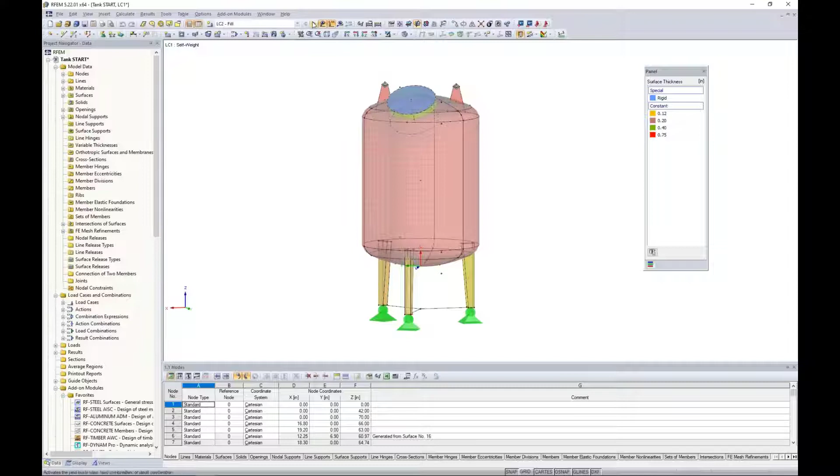We also had applied the loads to the structure, and we can see that within our drop-down box here are our different load cases. We have self-weight, which I don't have any visible loads displayed here because I didn't apply anything to the dead load other than accounting for the self-weight. Load case 2 here is the fill load, and this fill load was just an interior surface load within the inside of the tank.

We also have a wind load, so we can see the windward direction here from the global x-axis. We have a suction force on the leeward side. We also have a compression force coming up from underneath the tank, and we have a tension force up at the top here. Now we also put together all of our load combinations per the ASCE 7. So as we scroll through these, we can see all 3 of those different load cases acting together on the structure.

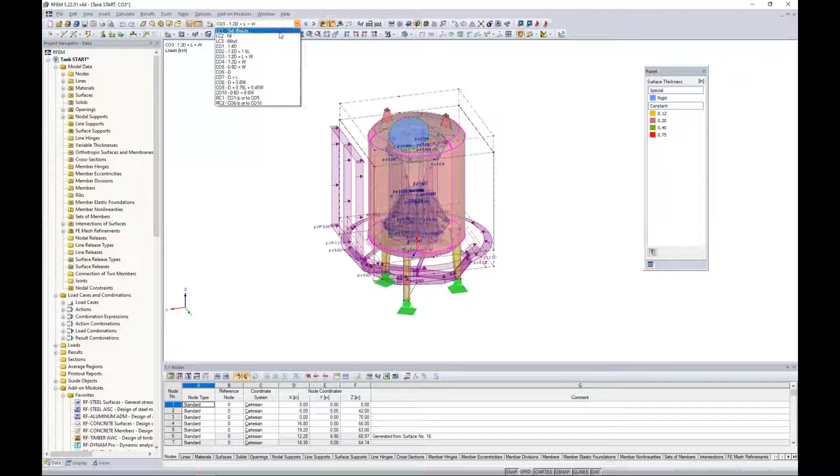So starting where we ended from webinar 1, we'd want to run a calculation, and we can go to calculate all. For the sake of time, I've already went ahead and done so. So what we would be presented once we run the calculation is our results. Within the project navigator, we should now have this 4th tab available to us called results. I think it's helpful if we just collapse most of these trees here, just to slowly go through all of the visible options.

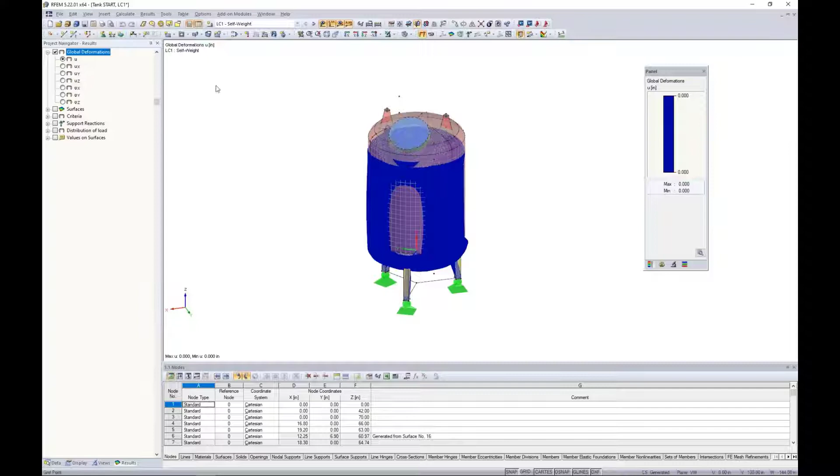We'll start off with the global deformations. As I'm scrolling through these different load cases and load combinations, and I can go ahead and turn off my loads as well, I'll see the general deflection of the structure. So this might be helpful in understanding the behavior under the applied loads. If we see something kind of flying off the page here, then we would understand that maybe we didn't correctly model something, or maybe our loads were incorrectly applied. So it just gives us a sense here if everything is going well.

I'm going to jump back to my fill load. Remember from webinar 1, when I double click on this fill load, we have it increasing linear in the Z direction. At the top of the tank, this fill load is 0, but as we slowly increase the depth, we eventually reach a magnitude of 0.4 kips per square foot, which makes sense since the bottom of the tank sees a higher fill load than the top.

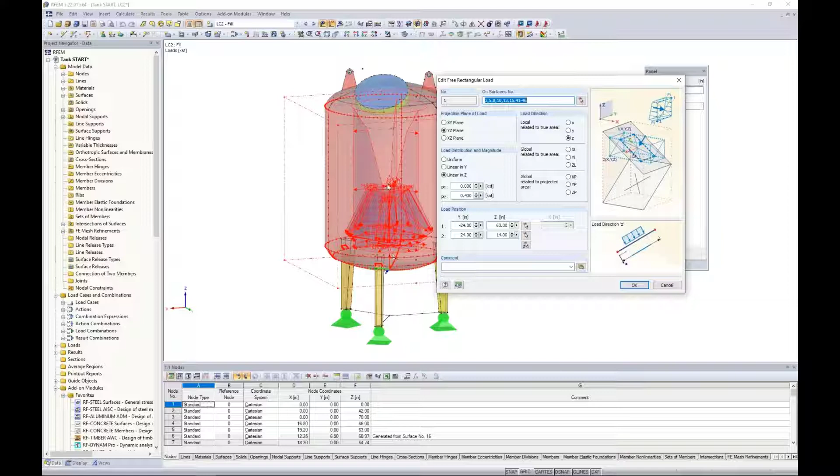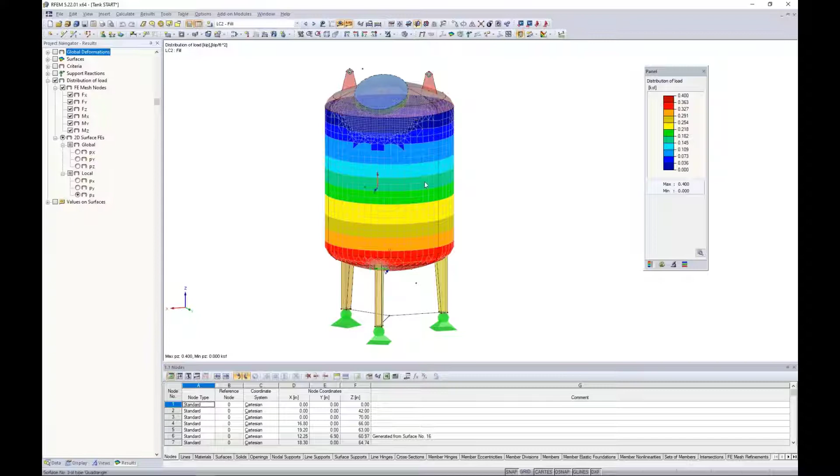With this load case, after running my results, I can turn off the global deformations and instead take a look at the distribution of load. So when I view the distribution of load in the local Z direction, we can see how this load was distributed on the FE elements.

At the top, we have this blue color, indicating 0 kips per square foot, which is exactly what I defined with that surface load. But at the bottom of the structure, we have red contours defined, which equals 0.4 kips per square foot. So this is a nice validation that we correctly applied that fill load.

In a similar sense, we can take a look at the wind load. If I display this load again, we have it acting in the global X direction. Looking at the distribution with these contours, I should see my highest compression force on the windward side, which relates to the negative value here. Then in the back, we have this suction or tension force, denoted by the yellow positive value at about 0.01 kips per square foot.

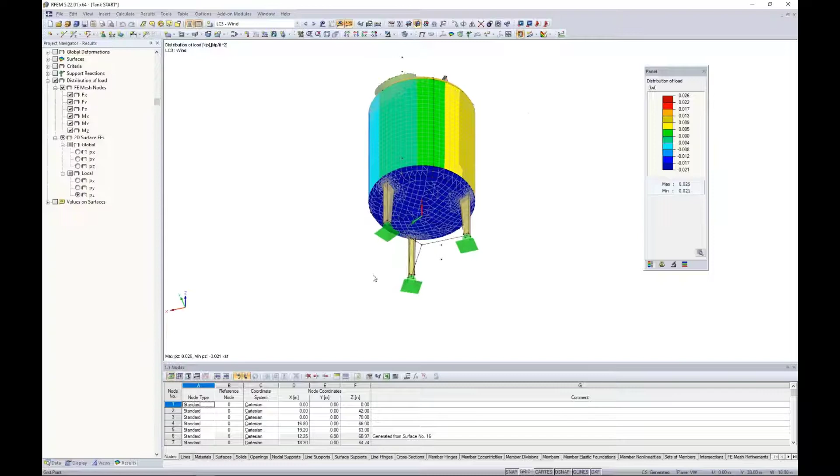At the sides, I should see essentially 0 because the wind passes right over each of the side surfaces, denoted by the green color. At the bottom, this shows the correct compression forces, and at the top we have suction forces denoted by red with a positive 0.026. Again, this is a nice validation to ensure we've applied our loads in the correct manner.

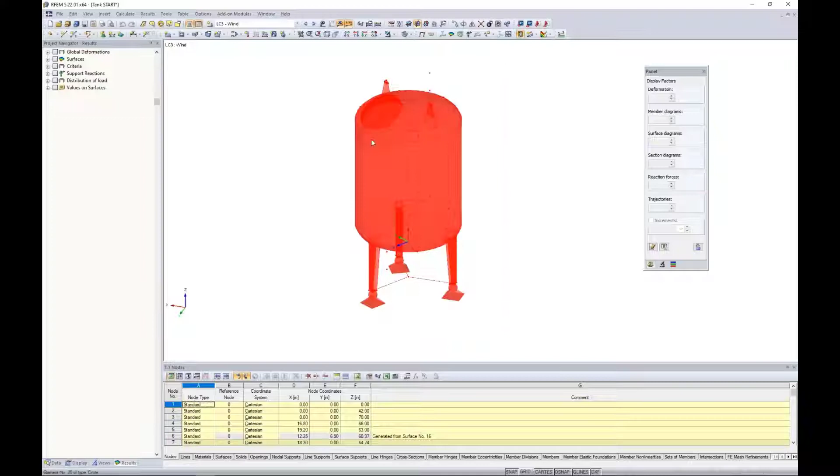We can also take a look at the entire structure by selecting it with my selection box. I can right click and view the center of gravity and info. The program throws up a warning that some elements have 0 density and won't be included in the center of gravity calculation.

We know this because in webinar 1 we created different intersections with our surfaces and deactivated components. We also have our rigid component for the top of our manhole that we wouldn't want to consider for the density, so that's why those are set at 0.

But this will give us the information of the center of gravity, and we can also create a new node. It's difficult to see, but there's a red arrow pointing to the center of gravity. More importantly, we can get information such as the surface area and the coating of the surfaces.

Why would the coating be important? If we wanted to layer some type of coating on this tank structure, or paint, we have the area in inches squared of how much paint might be required. We also have the volume of the material as well as the weight of the material—just a general summary of all the surfaces we've modeled.

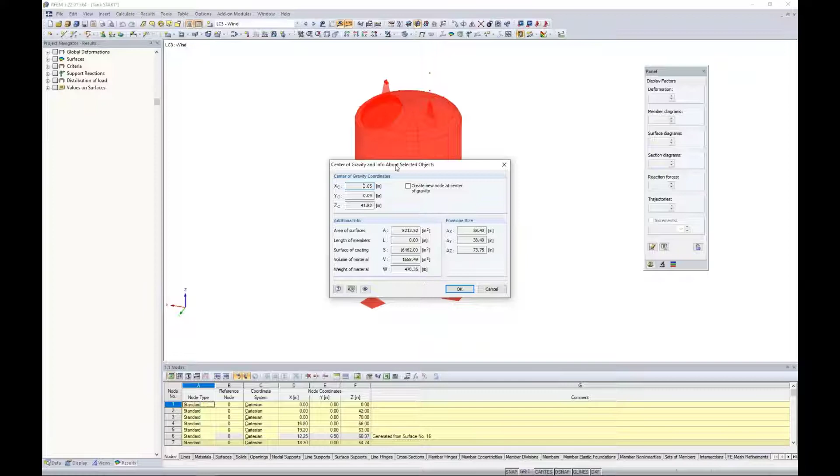In a similar sense, I can take a look at my tables. I'll jump to my results, which is table 4, and view my results summary. What might be interesting is to jump down to load case 2, our fill load again. We can view the sum of the loads in the Z direction, and you can see it's set at negative 3.03 kips—the total load from that interior fill load I've applied.

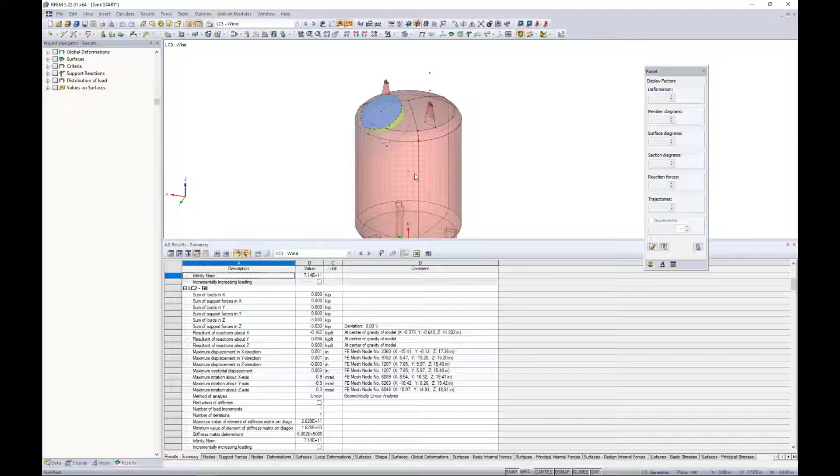We would expect our support reactions to match this sum of loads. So when I activate the support reactions in my project navigator, I turn on the global, making sure I'm under the fill load. We turn on the global Z components, and sure enough we have 3 reactions in the vertical Z direction at 1.01, which add up to the sum of loads for LC2, the fill load, at negative 3.03.

So again, just kind of checking here that everything matches up quite well.

Now we can really move on to the results of our surfaces. With this, I can expand my tree here for my surfaces, and maybe we jump to one of these different load combinations here to view our results.

Now, what we have visible to us here is local deformations. These are based on the lowercase x, y, and z axes. So this is related to the individual axes here of each surface rather than our global axes.

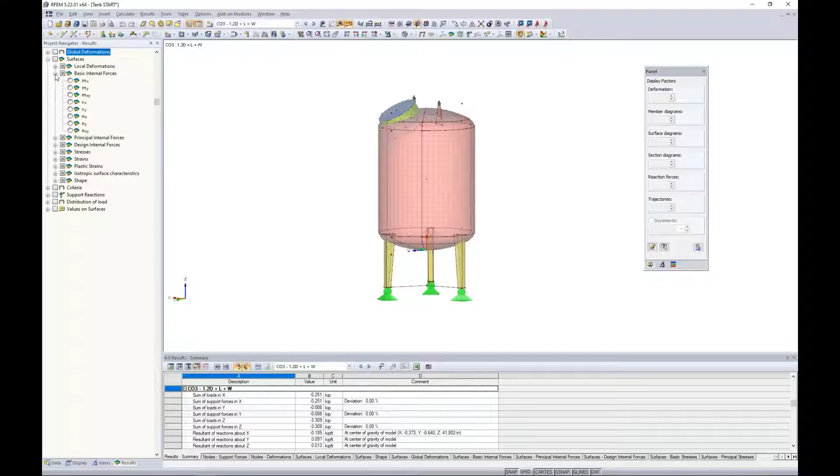But we can also view the basic internal forces. What I'll do here is maybe just activate a single surface and change the visibility by the selected objects. I'll zoom in here, and let me also right click to turn on the local axes of this surface element.

So we're currently viewing the bending MX. We also have MY. We can view the shear forces as well as the axial forces, NX, NY, and NXY. One thing to note here that is unique for surfaces is that MX is not bending about the local axes, it's along the local axes. So this is contrary to our belief for 1D members that MX would be bending about the local x-axis. Surfaces or plate elements have a different convention here.

One thing that I think is helpful to understand how these internal forces are calculated, or the convention related to these local axes, is under the help manual. We can take a look at the manual in PDF format for RFEM, or we can also access the online manual on our website. If you go to dlubal.com, you'll also find under downloads and info, online manuals.

I'm currently looking at the RFEM online manual, chapter 8 for results. If we scroll down here to section 8.15 for basic internal forces, the reason why I wanted to point this out is because it shows a nice picture here of the internal forces in relationship to the local X, Y, and Z axes. So again, we can see something like MX is bending along the X axes, MY is bending along the Y axes. We also see these axial forces, shear forces all shown here. So this just gives us a little bit better view of how exactly those forces relate to the local axes.

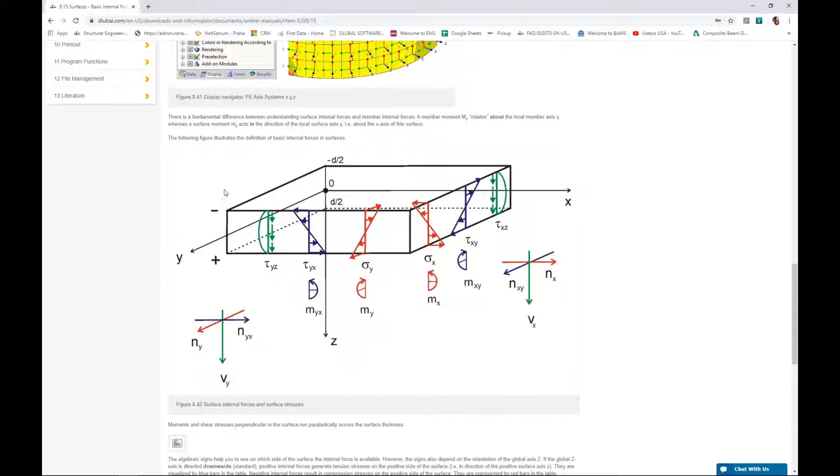Now keep in mind too that for all of these internal forces, this is true for stresses as well. The equations are directly within the help manual. So if we're curious to know exactly how these internal forces are calculated, again, refer to the manual. So going back to RFEM then, that will essentially sum up the internal forces.

But you'll notice that the next option, if I expand the tree here, is principal internal forces. This is showing me M1, M2, we have N1 and N2. So what exactly is the difference here between the basic internal forces versus the principal internal forces? The basic is really internal forces related to the freely defined X, Y, and Z local axes, as we already discussed.

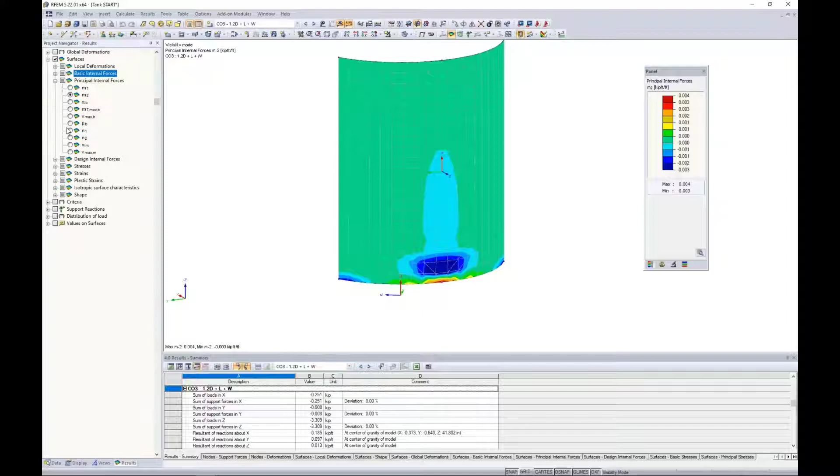For the principal, we will represent the extreme values of the internal forces. Essentially, we'll take the basic internal forces that we just saw and transform them in the principal axis direction. So principal axis 1 will be the maximum value, and we can see here M1. Then we have axis 2, which is the minimum value.

We also can display this alpha factor here. The alpha is going to be the angle between the local X or Y axes and the principal axes 1 or 2. We need to increase the trajectory factor here, so I do so quite a bit. Then we can see down at the bottom, those trajectories are visible to us, giving us the angle between our local x-axes and our principal axes.

Now, in some scenarios with a completely straight, flat surface, maybe there is no difference between basic internal forces and principal.

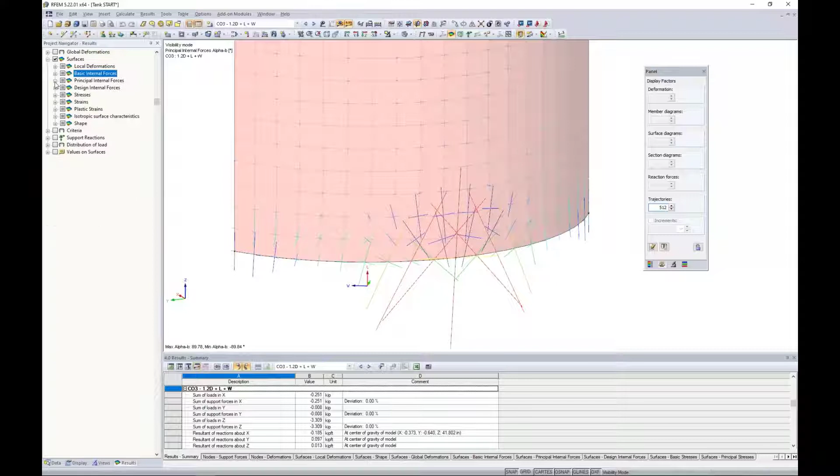Looking at the design internal forces, this is really more relevant to concrete design. So we're going to give you the positive and negative bending internal forces for the top of the surface versus the bottom of the surface. You can imagine how that's beneficial for concrete design.

This might be used if we weren't utilizing the add-on module within RFEM, but rather we wanted to take these internal forces into our own in-house tools or spreadsheets to do design. Now, today we have steel surfaces, so this really isn't of much interest to us.

Now we have the stresses also listed here. As far as the stresses go, these are only available within RFEM when you have purchased RF Steel, the add-on module. RF Steel, which we'll get into in just a minute, also releases these stresses within the main program. So if you did not purchase that add-on module, you would not see the stresses available here. This is true for all materials, even timber stresses, for example. You would need to purchase the RF Steel add-on module, which sounds a little counterintuitive, but essentially that's what releases these stresses we're currently viewing.

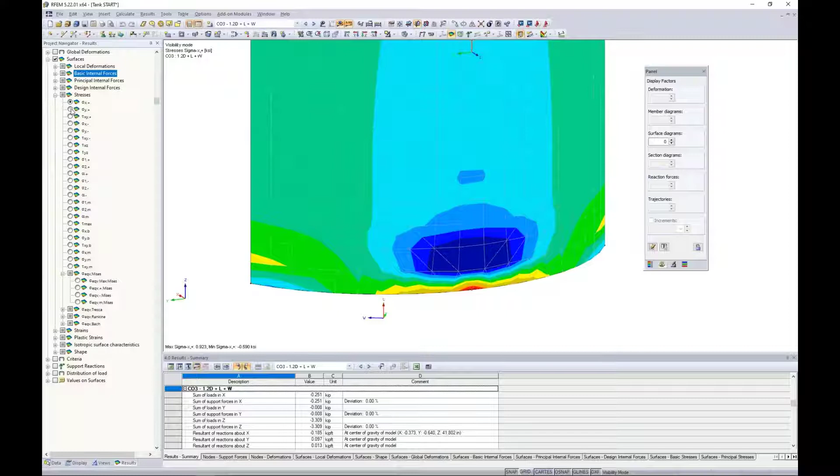So we can view the normal stresses in the X and Y direction, shear stresses, but we also have the principal normal stresses and principal shear stresses as well, based on those principal axes we just discussed. A little further down, you can see our equivalent stresses, and these are based on 4 different hypotheses: von Mises, Tresca, Rankine, and the Bach theory. Quite commonly, von Mises would be used for design.

We also can close down these stresses and view the strains in a similar manner. So we have our strains based on the local XY axes, principal strains, and of course equivalent strains as well, which again are based on those 4 different hypotheses shown here, which von Mises is probably most relevant to our design.

Jumping back to one of the basic internal forces here, it doesn't really matter which one. I'm going to cancel out this visibility. I thought it would be a nice feature here, if I turn off my local axes of the entire structure.

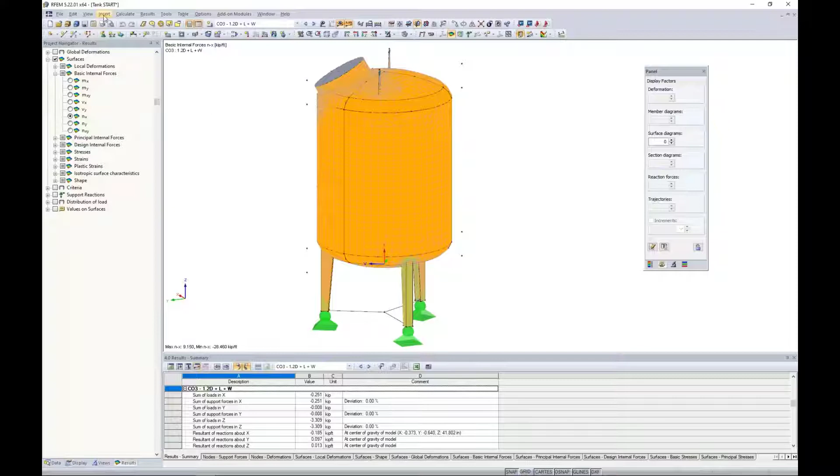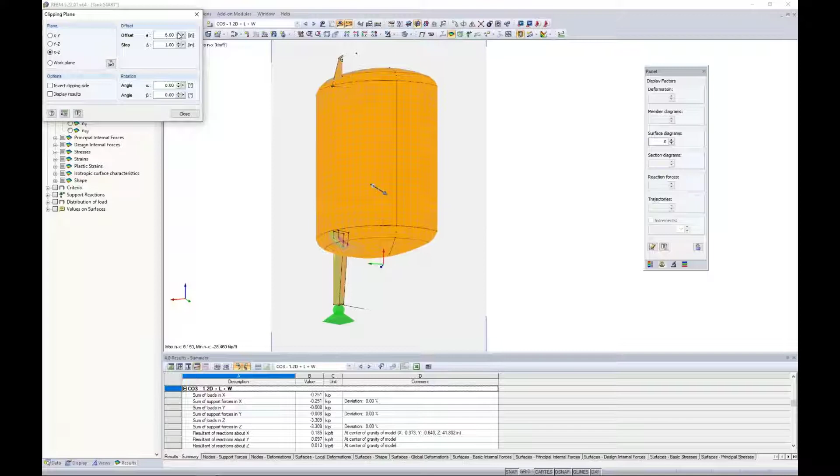What we can do to view the interior stresses of this kind of enclosed tank is to take advantage of our clipping plane. So under Insert, we have clipping plane. What this will do is essentially slice through our tank so that we can see the interior stresses. We can set a step distance of 1 inch, for example, and then use our offset button to click around within our structure, which will essentially cut through that structure with the clipping plane.

We also can change the planes we're viewing with this clipping plane, and even more so, we can change the rotation. So we can change this to 25 degrees, for example, and now we're viewing this clipping at an angle. Obviously the clipping plane may be an advantage when looking at enclosed type structures such as tank elements. Where it's an even bigger advantage, as you can imagine, is with 3D solid elements, where we truly can't visualize the stresses on the interior of the solid element. Clipping planes can become very useful there.

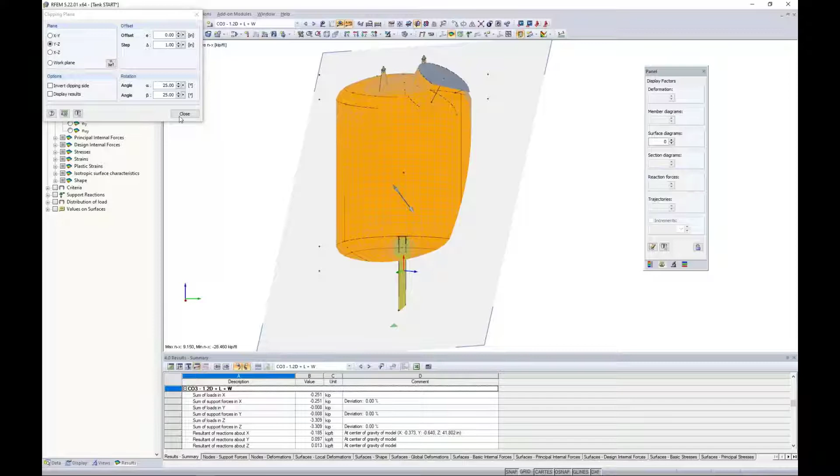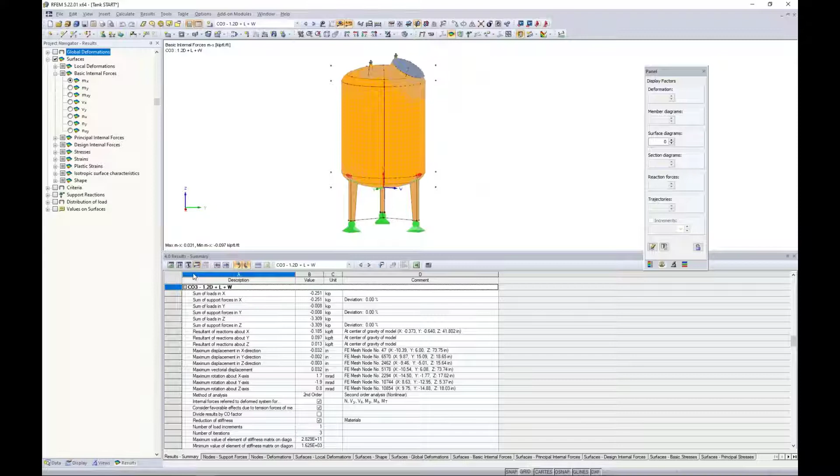So currently we're looking at everything graphically, but I wanted to point out that all of this information we're seeing visually here is also available in table format. We can view this under Table 4.0, the results. Perhaps we jump to the surfaces for the basic internal forces.

Now there's a couple things I want to point out here. We're currently viewing each surface, and you can see the program syncs up in the background with which surface we're looking at. But if we jump down to surface number 5, you'll notice only a single point is given to me here with internal force values. So why is that? Well, I'm going to create visibility by the selected objects to take a look at surface number 5, and you'll see that single point given to me right here in the center.

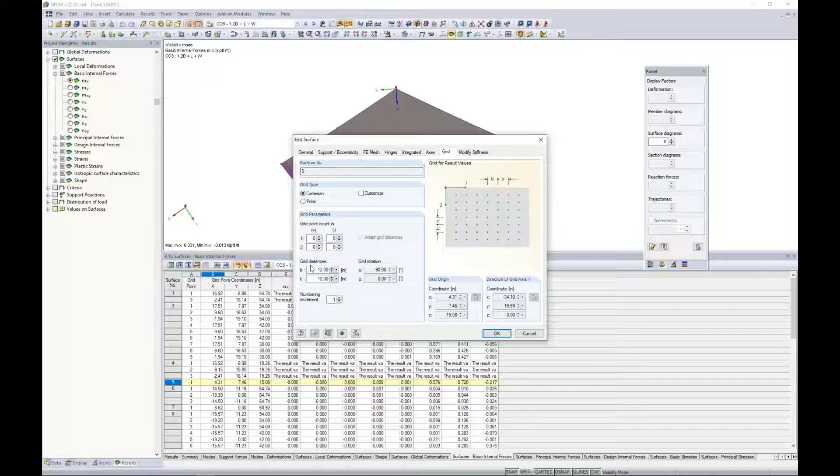This is a problem. Obviously, we're much more interested in the internal forces going on around this entire surface, so why is there only one value given? Well, that's because the results are based on grid points. If I double click this surface to edit it, we have a tab here called Grid, and by default the grid spacing is set at every 1 foot. Well, this is entirely too big for our model today.

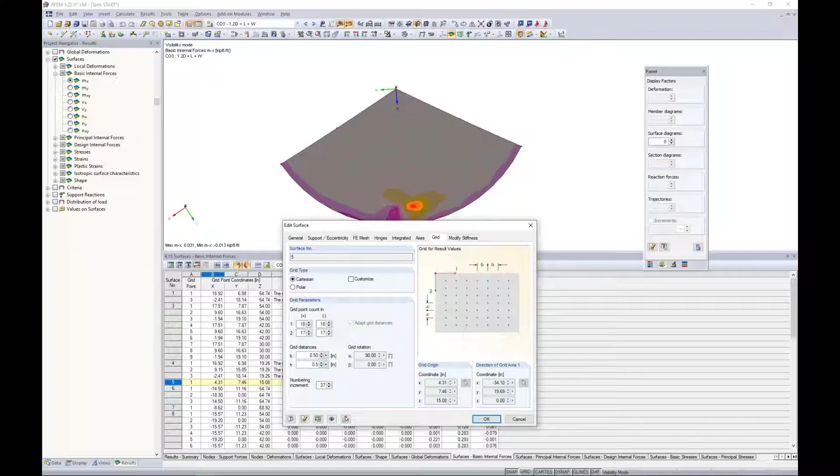Now, this tank structure is fairly small, so we need to go back - in webinar 1, we did this with the FE elements. We want to do the same with these grid spacings, changing this to maybe something like 0.5 inch spacing. And I click OK. So now you'll notice with surface number 5, I have many more points available to me here.

This is obviously going to be much more beneficial than just a single point element. Now the question might be, is the analysis incorrect without changing those grid points? And the answer is no, the analysis stays the same. You'll notice we didn't have to rerun it. Everything we're viewing visually here is based on the FE mesh element points. And if I turn off my results here, turn off my loads, these FE mesh points are producing the results, and then we can graphically see this with the nice contours.

When it comes to the table, we're not presenting results based on every FE mesh point. You can see it's kind of all over the place, there's really no nice pattern to the FE mesh. So instead we're presenting it to you in grid points, so that every 0.5 inch spacing we're getting a result.

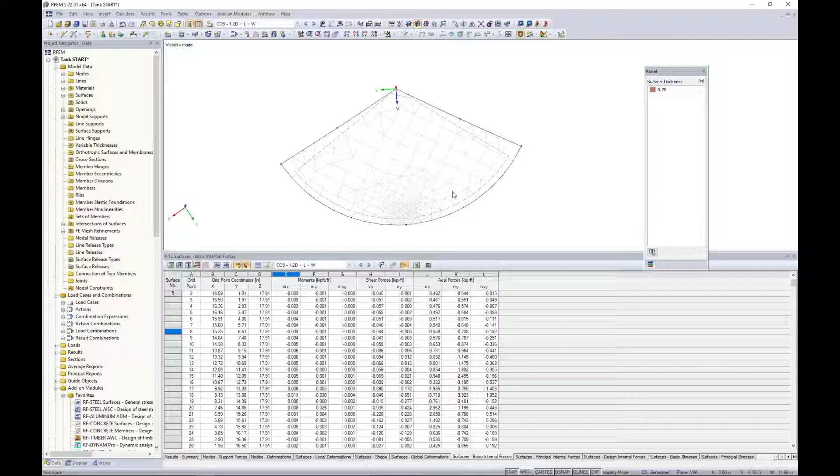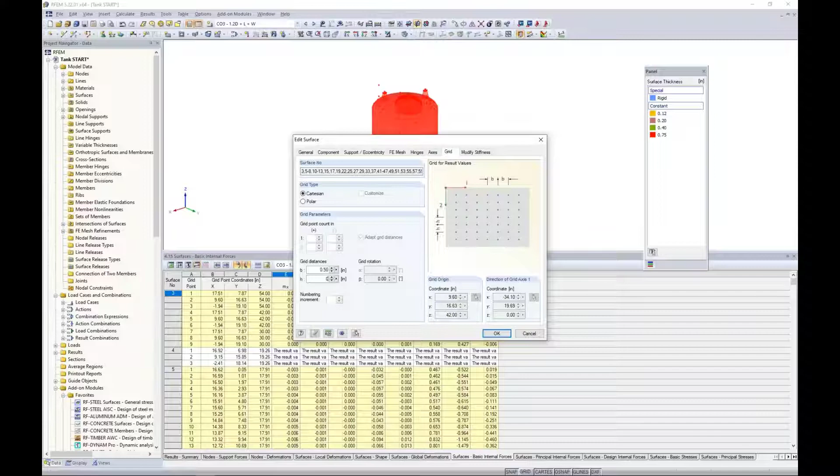Which makes a little more sense than displaying every FE mesh point. So what we need to do is cancel our visibility mode, zoom out to the entire structure, and select all surfaces. We can double click on them, and under the Grid tab, change the grid spacing of all surfaces at once to 0.5 feet, then click OK. Now we'll see much better results within our table.

Keep in mind, for these table results we can export this single table automatically to Microsoft Excel. I can simply click this button here, and the program will take this current table and export it over to a Microsoft Excel spreadsheet.

If we wanted to export multiple tables at once, maybe for multiple load combinations or load cases, that's possible by going to File, Export. Here we have an XLS format, and when I click OK to export to Microsoft Excel, this gives me quite a few more options.

You'll notice here I can activate my results, for example, and I can take a look at these detail settings for the selected tables. I can turn on several load combinations or all of them, and I also can select different tables to export.

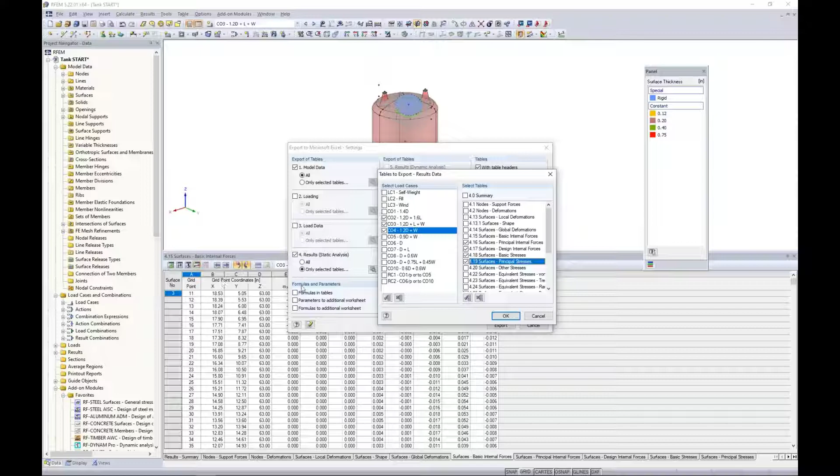You can imagine this is quite a bit more efficient in terms of exporting rather than every single table from what I previously showed you. But if you're just looking for a quick export to further sort or filter data, then of course that's possible here as well.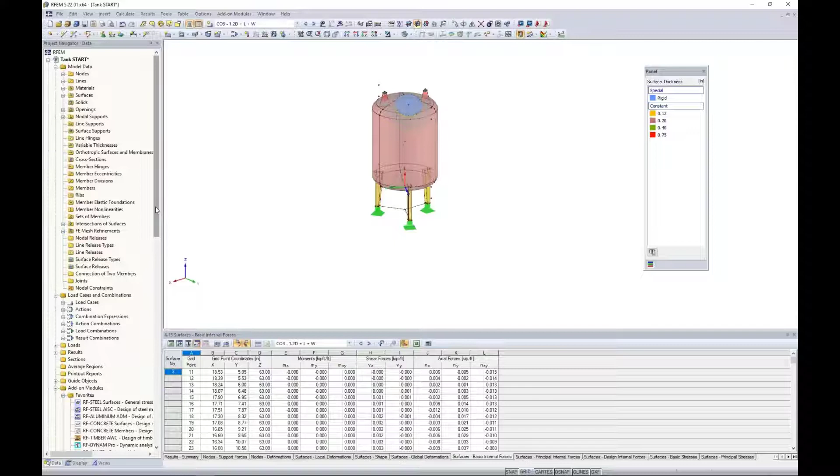That really just gives an overall summary of the analysis results within RFEM. What I'd like to cover now is the general stress design of these surfaces utilizing our add-on module RF Steel. I already mentioned that RF Steel releases the stresses within the RFEM analysis, but it also can be used to do a general stress design.

We can access the add-on modules, as I pointed out in Webinar 1, under our Project Navigator. Here's our long list of add-on modules. RF Steel Surfaces is at the top because I've right-clicked and activated it as one of my favorites to jump it up here. We also can access all the add-on modules from our drop-down box at the top under Design for Steel, and you'll see RF Steel Surfaces there.

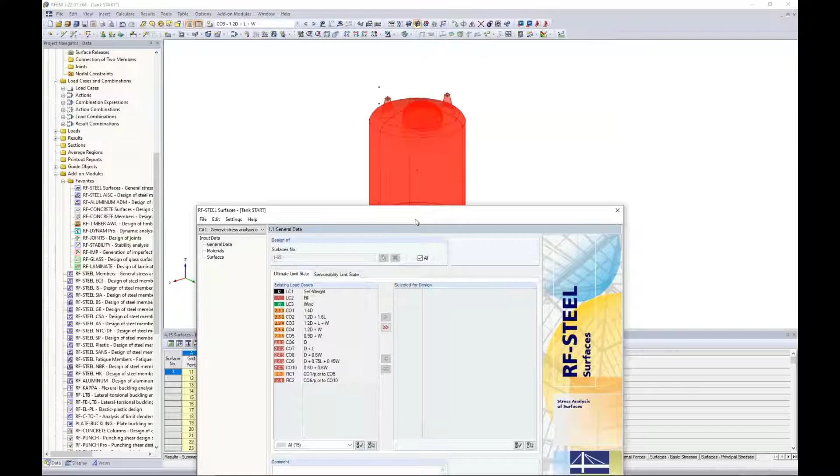With this add-on module, as I always like to mention, it's just a simple dialog box that pops up within the main program RFEM. I don't need to remodel the structure, I don't need to redefine loads. Even all of those internal forces and stresses have already been solved for, so all of that information is coming into this add-on module. We're just specifying a little bit more information specific to the general stress design.

Now keep in mind also that this is completely code independent, so we're not designing per any particular code. We're just comparing the stresses from the analysis to the limiting stresses based on the material.

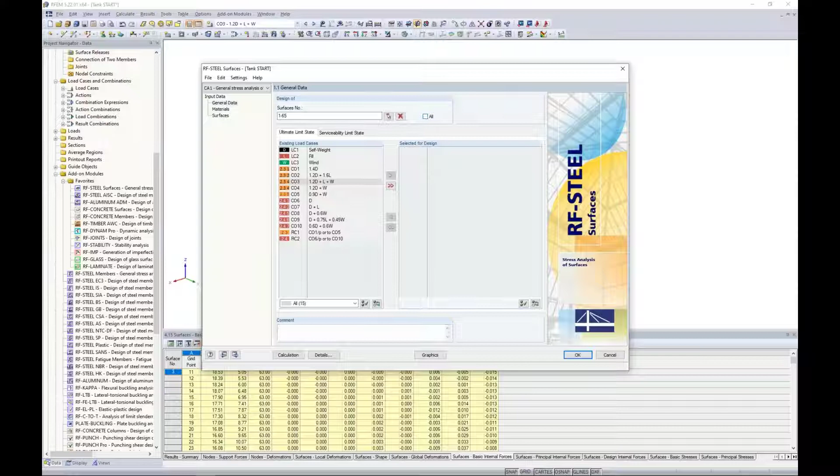By default, the program selects all surfaces to be designed, but I don't want that today, so instead I'm going to graphically select which surfaces. Under the Display tab, under the Views tab, is where I'll activate my surfaces by thickness. So I'm going to choose my surfaces that are 0.2 inches thick as well as 0.12 inches thick. This will highlight only, in the graphical view, the body of the tank as well as the legs.

So these are the only surfaces I'm interested in designing at the moment. You'll notice everything else is hidden, including the components on our roof. When I click OK, all of those surfaces are individually listed out here.

For the ultimate limit state, I want to move my LRFD load combinations over to the right-hand side to be considered for design. Additionally, I could select the result combination to move over, or I could just design the result combination itself. If we remember from Webinar 1, result combinations are an envelope solution. So I have RC1 here, which is the envelope solution for all my LRFD load combinations, showing me the max and mins. I prefer to list out the load combinations individually so I can see my max and mins from each one, but either approach is possible.

The serviceability limit state is to check deflections. For my tank example today, I'm not so concerned with checking deflections, but if we were designing some type of floor element or industrial structure that's sensitive to machinery, deflections would truly be a concern, and this is where we'd move our ASD load combinations over to the right-hand side for serviceability. We'll leave those blank for now and move back to the ultimate limit state.

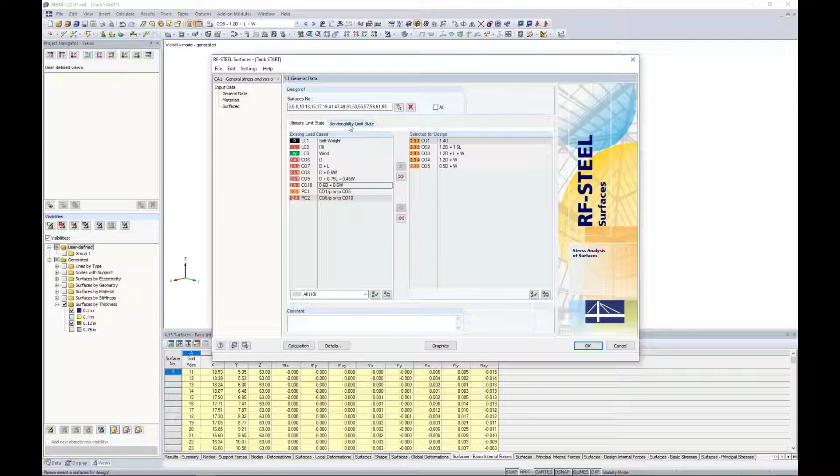We continue down our list. The materials are automatically brought in from RFEM. We have our stainless steel material, and the yield strength is given as 30 KSI, and the limiting stresses are automatically filled out here. We can see the limiting normal stresses as well as shear stresses. These are the values the program compares to my analysis stresses to give an overall design ratio. You can also choose to manually override these by clicking this button, though we won't be doing that today.

Under the edit material settings, we can also set a few different ranges based on material thickness. For a thicker surface, we might have a higher yield strength, so we can set those ranges for thickness as well as equivalent yield strength, and the program will consider that for the design of our surface. Today that's not so important since we only have uniform thicknesses for our surface elements, but it's one option to consider.

Also, RF Steel isn't specific to only steel materials. For example, if you wanted to do a general stress design for aluminum, you could bring an aluminum material in here. You would need to modify the limiting stresses manually, but then we could do a general stress design for aluminum surfaces as well. So it's not only limited to steel.

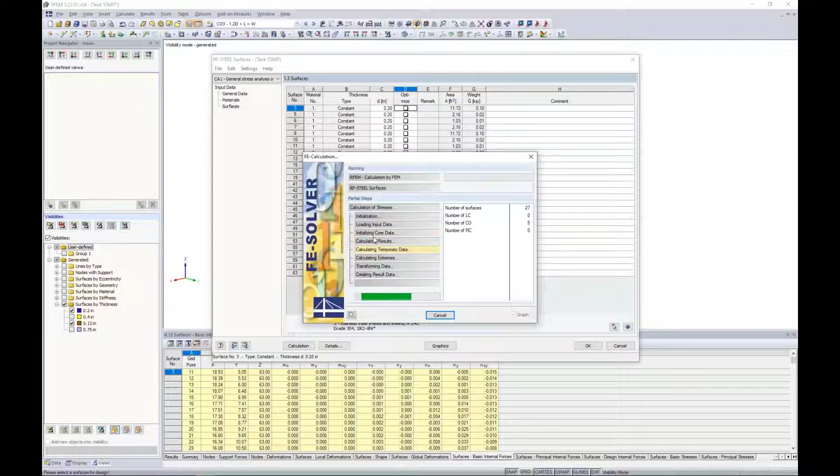When I run the calculation, it solves pretty quickly because we already have all of our stresses from RFEM and the analysis for LRFD load combinations. We're just bringing them into this add-on module and comparing them to the limiting stresses based on the material.

We now have our results tables available, and we can view the stresses by load case, by material, or by surface. When I pull this down, everything is synced up in the background. We have the red arrow pointing to where the controlling internal force is, as well as the surface highlighted that we're currently looking at.

Here's the column for existing stresses, all listed out. Here's my limiting stresses based purely on the material, and from this information we get the general stress design ratio. Now, there are only a handful of stresses listed out here.

Under the Details tab, this is where you can control what stresses are turned on or off and used for this design. By default, we've already selected a handful of stresses available. We don't want to check all of them—that's completely overwhelming and may not be necessary for the design. But if you're interested in turning different stresses on or off, you can do so under this Details tab.

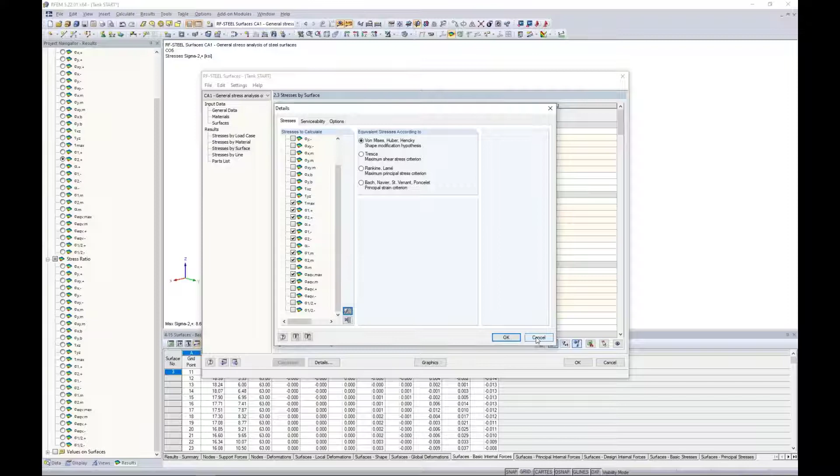For the most part, most of these stress design ratios look okay. But when I take a look at the filter options here to filter to the max design ratios, and view the summary down at the bottom, I have a max check of 1.4, which is greater than 1.0.

So I'm shown here my red sad face. This is obviously something that we need to address. We're over that yield strength. So how can we do so? Well, let's take a look at graphically what's going on rather than just in our tables.

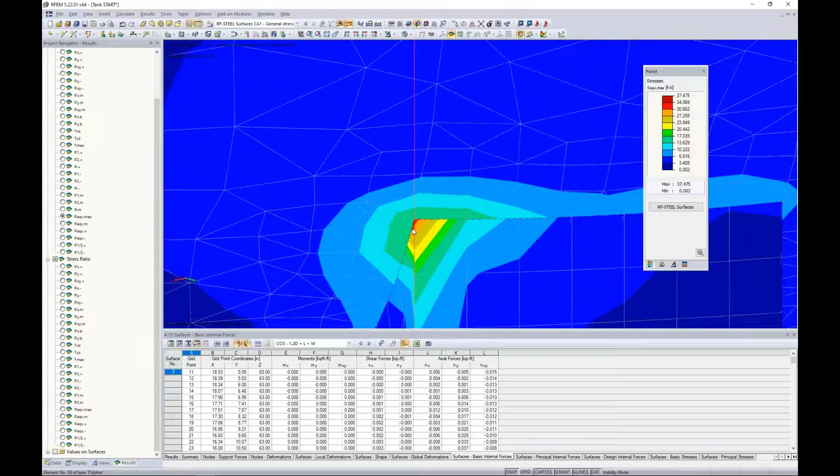So I'm going to click here to my equivalent von Mises stresses. You'll notice it's for load combination 3, and I can click on my graphics. Most of the tank here, when we look at our von Mises stresses, keep in mind we're still within this add-on module RF-Steel, we just view the stresses or stress design ratios graphically. When I scroll in here, we just have these teeny tiny points that are really causing the issue, and everything else looks completely fine.

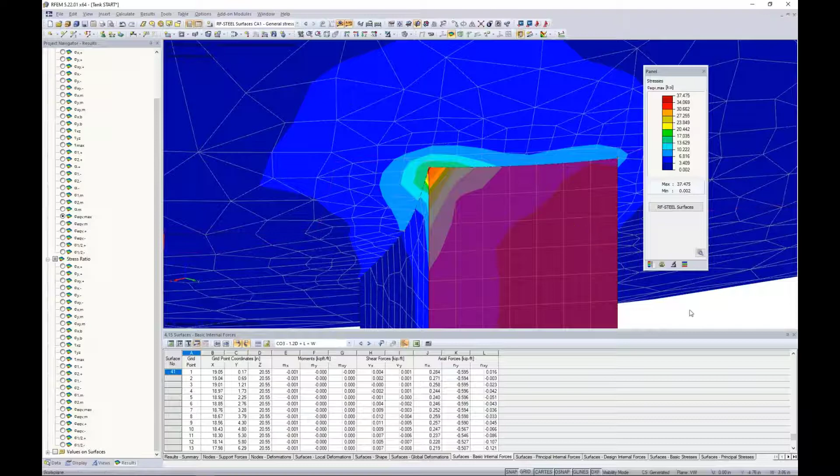So this is what we would call a singularity. Singularity is not unique to RFEM, it can happen in any finite element analysis software. It's really a point, an FE mesh point, where we have a very high stress concentration and we're not getting great load distribution. We know in reality where this tank body connects to the tank legs, we're going to get much better load distribution all along this length than what the program is showing me. So how can we better tell the program that the load distribution is there, that these high stress or high peak points are causing the over-design of my general stresses to be much too high?

Let me jump to load combination 3 here, because we've determined that that's the controlling load combination, and I'm going to turn on my stresses, my von Mises stresses. So this is exactly what we were looking at within the add-on module itself.

Under the display tab, this is typically what would be available. I know it looks a little overwhelming, but we can collapse these trees, and eventually I want to focus on this results portion here. We also have these surfaces, which I can expand under the results, and the distribution of internal forces and stresses. You'll notice here that we have several options for how we display these stresses. The third option is default here, but I want to focus on the first 4 options and what exactly they mean within the program.

And for this, I'll jump to the PowerPoint. As far as the display of surface results and those 4 options, number 3 here is default within the program, and we'll get to that in just a minute. But let me begin by explaining the concept here of these 4 pictures: we have 2 adjacent surfaces. The surface on the left is denoted by 6 FE mesh elements with their individual boxes, and then we have a surface element adjacent to it indicated by these 3 FE mesh elements.

So when we choose the first option, constant on elements, we have every FE mesh element point, right? And we're going to average out those 4 points for a single FE mesh element, and give you that average value right here in the center. Then we're going to base our colored contours only on that average value, so each FE mesh element will only have one color.

The second option, non-continuous, you can see there are quite a bit more results available because instead of averaging out those 4 corner values, we're going to display them separately for each FE element. So now you'll see multiple color contours within a single FE mesh element.

The third option is continuous within surfaces, and this is the default within the program. So what we do here is take the average at the FE mesh point itself, then use a smoothing algorithm to tie these values together in nice contours so it creates a great display when viewing it within RFEM. But notice we do have a clear hard line here between surfaces, so my surface on the left has its own contours and my surface on the right has separate contours. Quite honestly, this is default because it works quite well in a majority of cases, especially when looking at a more global scale, like a concrete slab element.

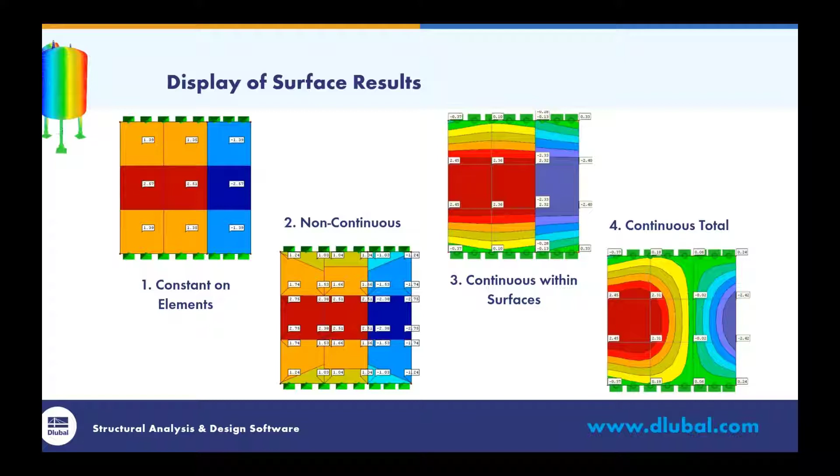So again, number 3 is typically fine, that's why it's default, but there are scenarios, especially when we're looking at a much more local scale here of where these small little elements are connecting in every FE mesh point, that we want to change this to actually constant on elements.

Going back to the RFEM model, you'll notice that when I have this set as default, continuous within surfaces, my von Mises stresses is set at 37 KSI. When I change this to constant on elements, now each FE element has its own color, and the stress drops significantly from 37 KSI down to 16 KSI. That's a huge difference. Now, this doesn't relate to what's right versus what's wrong with the analysis itself. It's purely how we're viewing our results graphically. Just by changing this view, you can see how much those stresses are impacted.

Now, when I go back to the add-on module RF Steel, let's launch this add-on module. I want to point out that I changed my display, as we saw back in RFEM. But when I'm looking at the total stress design ratios here, they're still showing 1.4, which we know our highest equivalent von Mises stress is only 16, so we should be well below this.

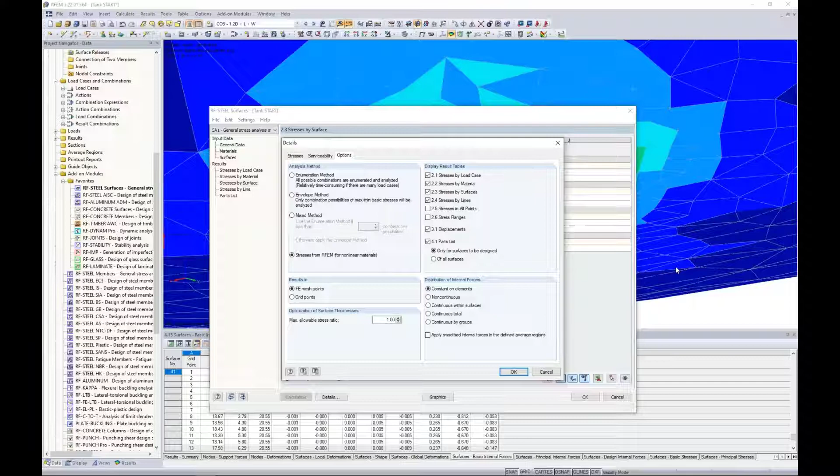Well, the reason why is under details, we need to set this under the options as well. We would change the distribution of internal forces to constant on elements. So although we've changed it back in RFEM, the add-on module has its own separate option that we want to change. When I click OK, the program says it needs to recalculate the results. So we let it bring in those internal forces again, and it compares to the limiting design stresses. Sure enough, you can see my max design ratio is now 0.62.

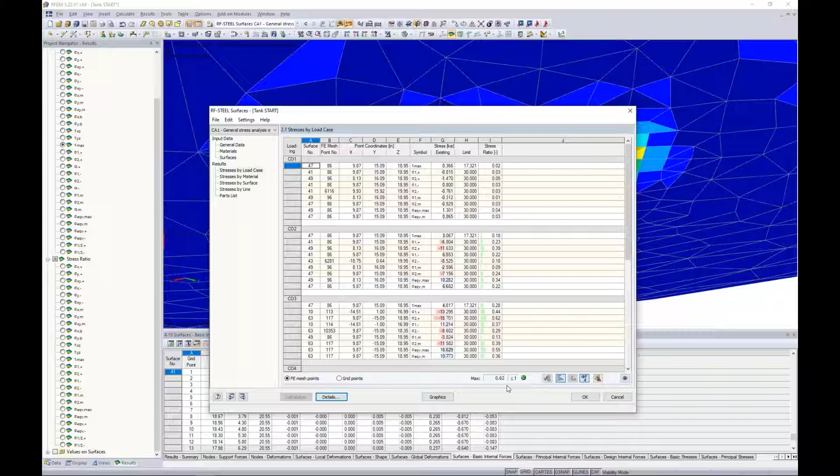So just by changing the view of our results, we can really significantly impact the overstress design ratios within the add-on module. Now, if we take a look here at stresses by surface, the von Mises stresses, for example, and jump to my graphics view again.

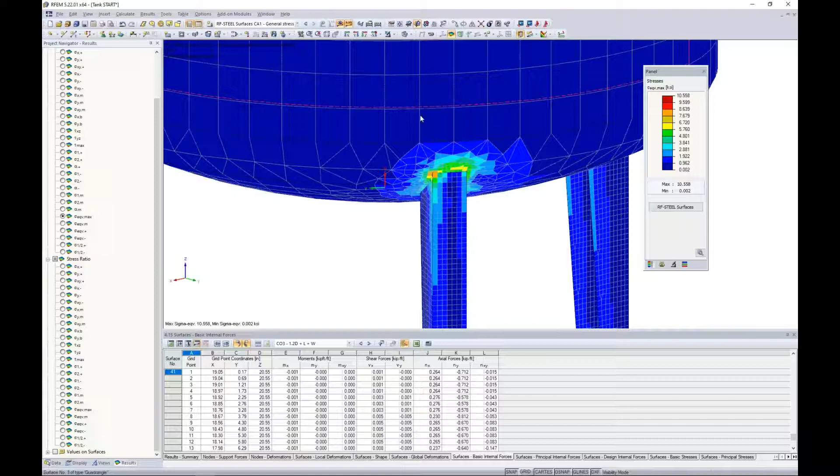I'd still like to point out, though, we took care of this high design stress ratio. We're definitely sitting much better, but I'd still argue that there's a singularity occurring at this location. If you look at the rest of the structure, the stresses are so low, but when we look at these FE mesh points, they're still relatively high. So I want to take this a step further to address these singularities by applying what's called an average region.

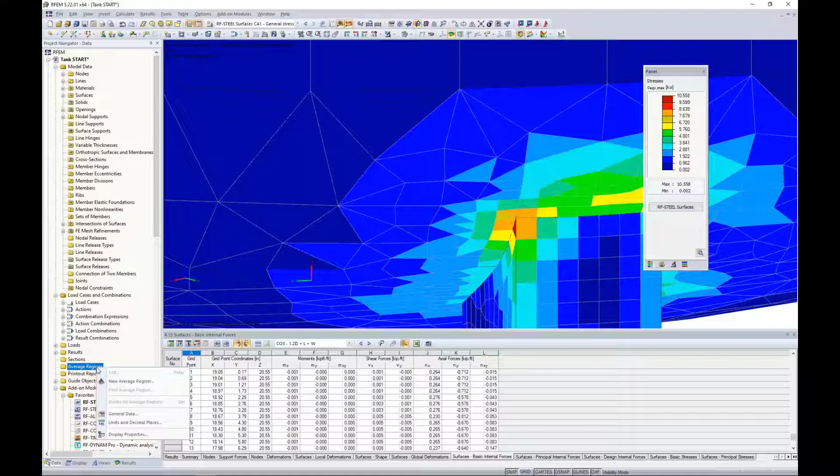So under the Data tab, what I can do is access a new average region by right-clicking on it. We launch the dialog box, new average region, and it's exactly as it sounds. What we're going to do is average out the internal forces over a particular region. This is quite powerful because I can select multiple surfaces here to be considered, so we'll select the tank body.

Maybe I also select these two surfaces from my tank leg, and I click OK. So we need to define the average region as a circle as well as the dimensions, and the dimensions I will set at 2 inches. Now, the question we may get is, well, how big to set the average region?

This really depends on your project, and it's up to the engineer's discretion. We're working with a very small tank here, so 2 inches is adequate to apply this smoothing region at this particular location. But you can imagine if we set this at something like 2 feet, that's entirely too big to average out the internal forces. But 2 feet might be perfectly fine when we're averaging out a concrete slab where we have a column framing in. So again, it really just depends on your project.

We want to tell the program where to place this average region. So graphically, I can select this node here, and the coordinates are automatically populated. I'm going to choose all 4 checkboxes here. What this does is average out the internal forces in all directions. This is based on the local axes, U and V, of the average region versus the local axes of the surface, X and Y.

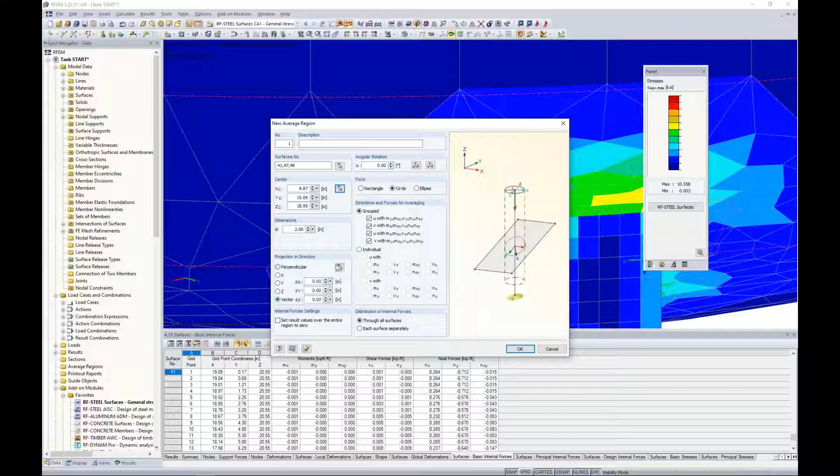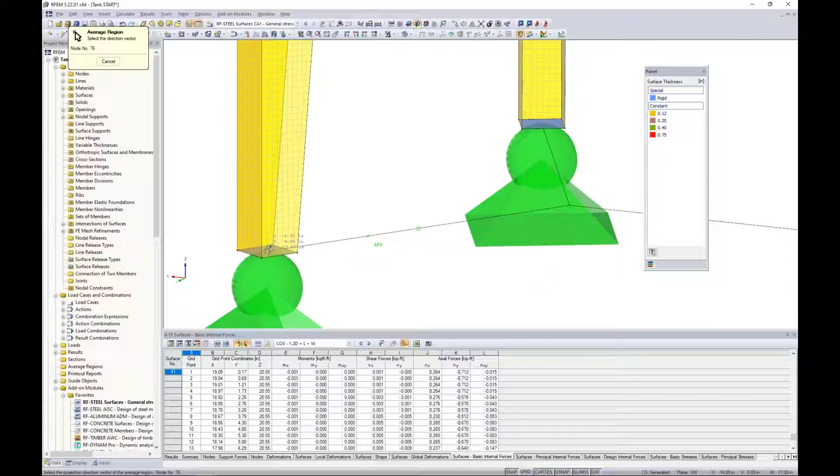So instead, what I can do is choose my own direction vector to kind of average out these forces. When I choose this option, it allows me to graphically select a couple points. I'll zoom out here, turn off my results, and cancel my visibility mode. We remember from the first webinar, we created all of these points, and zooming into the bottom of my leg, I'm going to choose the center point here. My second point is going to be the center of the tank structure as a whole.

Now this projection direction was automatically calculated, and you can see the parameter set here. We want to distribute the internal forces through all surfaces. When I click OK, it might be better to turn this to a wireframe view. We have an average region defined here. It's a little difficult to see, but you can see that we've applied this 2-inch average region, and it's being projected towards the center of the tank structure.

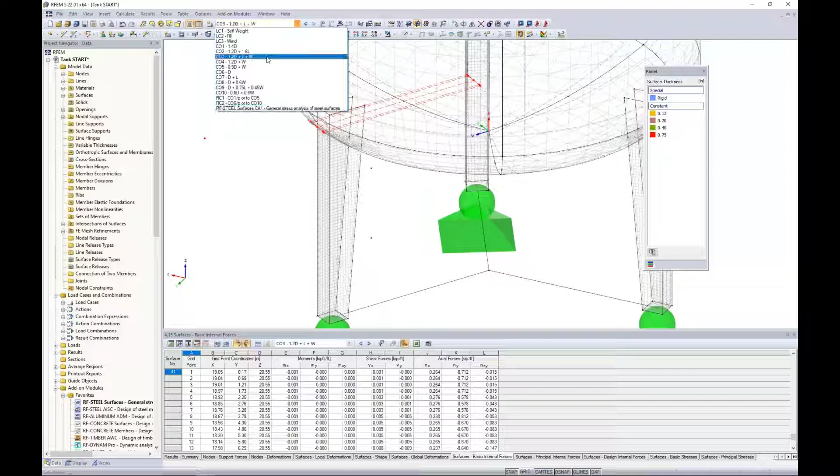So when I apply this average region, I'm going to view my results for load combination 3, and we can turn these on. I'm going to maneuver my model here and zoom into this point. I'm currently viewing my von Mises stresses, and notice that we no longer have these high peak forces here—we're instead averaging out over this 2-inch diameter region for those von Mises stresses.

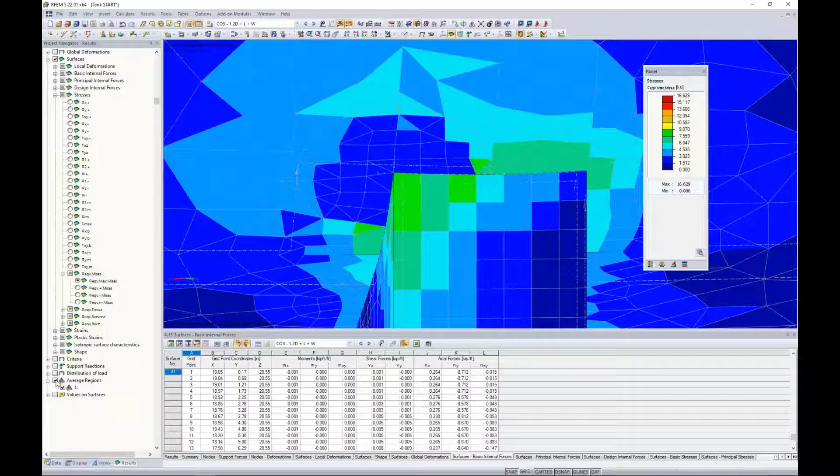Now, when you apply average regions, you have a new checkbox here in your results where you can turn the average region on and off. If I turn it off, well, here we go—there's those high stresses visible to us. We can activate the average region again, and they completely disappear.

So we'd want to continue adding these average regions to other locations where the legs are framing into the tank body, just to alleviate those high peaks. For the sake of time, we won't be doing that today, but hopefully you have some insight on how to apply average regions for odd structures like this. Obviously, a flat surface would be much easier to apply an average region to in terms of the projection direction and such.

Now back under the Data tab and RF steel surfaces, in a similar manner to what we saw previously with the display of internal forces, under the Details tab and Options tab, we need to apply the smoothed internal forces from the defined average regions. Otherwise, they will not be considered. So we just take that extra step within the add-on module to say, yes, please consider them with the design.

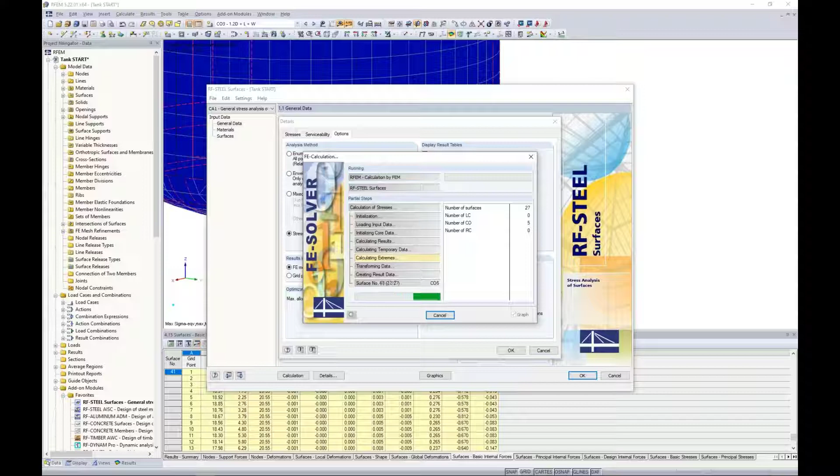The program will cycle through the quick analysis again, and we'll be presented with our results. Now, I didn't apply the average regions to the other locations, so we're still seeing the same design ratio, but we would expect this to fall significantly, and then maybe we could optimize our tank thickness quite a bit further.

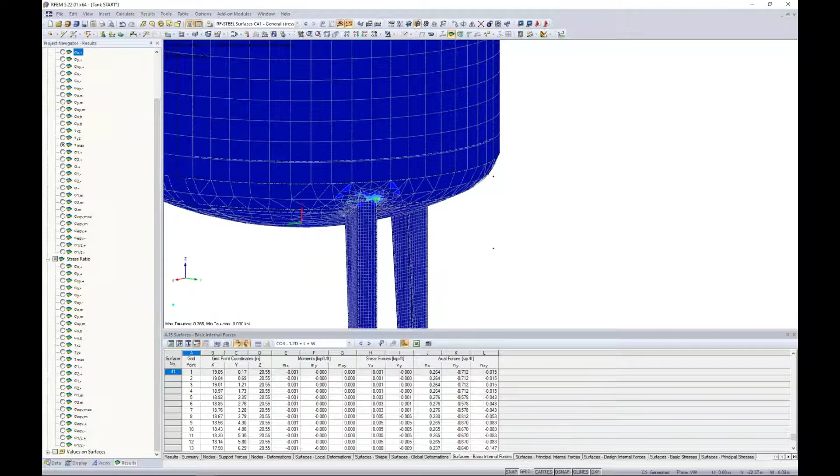All right, so that really explains a general stress design for these surface elements utilizing that add-on module. The next thing we'd like to discuss is the stability design, and in particular, the buckling behavior of this structure, and we'll be relating that to imperfections.

So I'm going to launch RF stability from my list of add-on modules. When I do so, the add-on module has a similar feel to what we saw with RF steel surfaces. Now it's a little different—this is going to allow us to run an eigenvalue analysis on the structure.

In previous webinars, I've used RF stability to track down instabilities. We all know that instabilities can be incredibly frustrating within a finite element software, so RF stability can be extremely helpful in tracking down where exactly we may have a problem. But today I'm going to utilize the add-on module to do a general buckling analysis to identify modes of failure for the structure under the applied loads.

The number of eigenvalues needs to be defined, and the default is 4, so we'll leave that as defined here. We want to import either a load case or a load combination. My worst case scenario has been load combination 3, and you certainly want to import a load case or combination that has the highest axial forces. We know this will give the worst buckling failure modes, as opposed to importing something that's applying tension forces. For example, the program will throw up a warning that says it can't apply the eigenvalue analysis for buckling because we have tension forces. So something to keep in mind there.

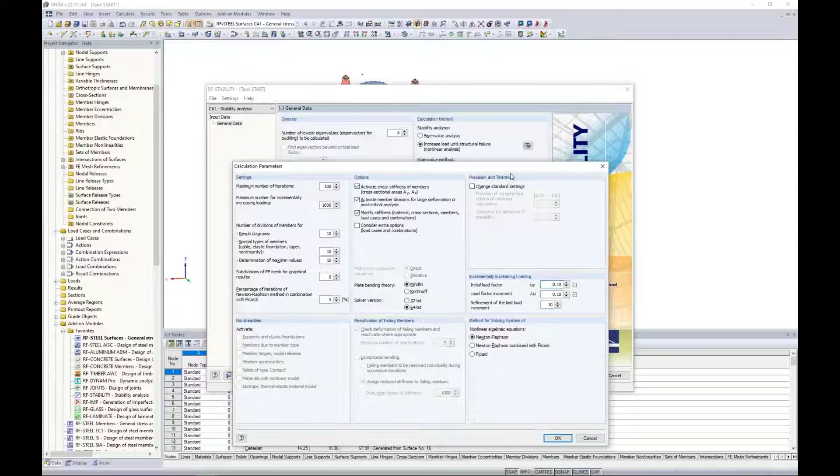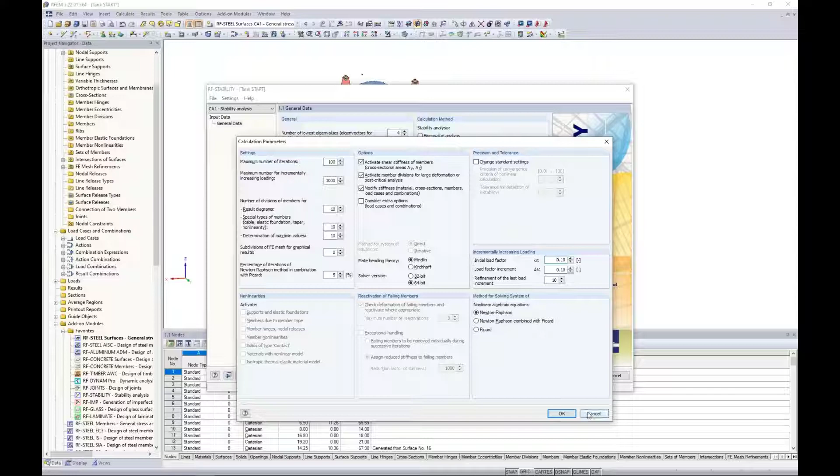We do have the second option here to run a nonlinear analysis, and this will consider any geometric or material nonlinearities back within the main model. We have the ability to incrementally increase the load. This whole section I'll get into later at the end of the webinar, because I think it's pretty powerful in what we can do with a nonlinear buckling analysis. But for my initial calculation, I just want to run a linear analysis to get the basic buckling failure modes.

Now, when I click calculate, the program is running through the first 4 eigenvalues. You can run up to 100 eigenvalues if you want, but it doesn't make much sense to look at those higher eigenvalues, because that buckling mode failure will probably never occur—it takes extremely high loads to even see that type of buckling. So that's why we set this at 4 eigenvalues, which will give us the general failure modes within our structure today.

Once this is done solving, we're presented our results here within table format, and we see the first 4 eigenvalues given to us. We can also scroll through these, and you'll notice in the background the RFEM model is synced to whatever mode shape we're currently viewing—it looks to be essentially buckling of this leg on the right-hand side for the first 4 eigenvalues.

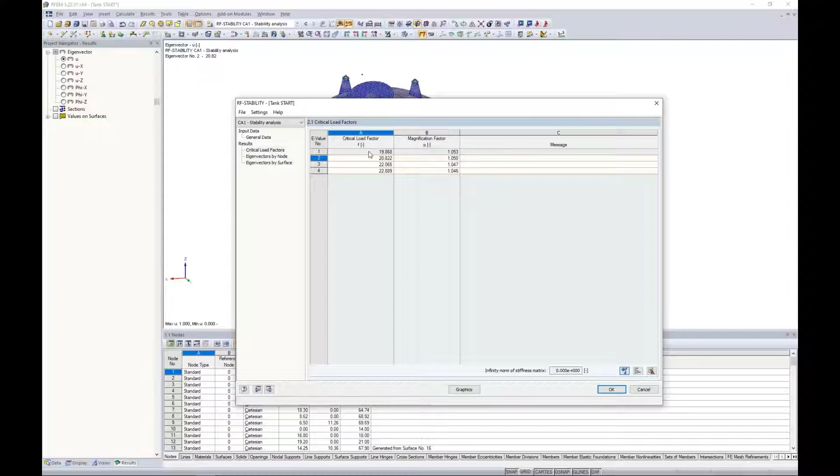We're also presented with the critical load factors. These critical load factors are the value you can multiply load combination 3, which we imported, by before we see the failure buckling mode shown in the background. So additional eigenvalues may not be so relevant at higher numbers. But if we were solving for higher numbers, we might see buckling of the other 2 legs, or even buckling of the tank body itself—something to play around with.

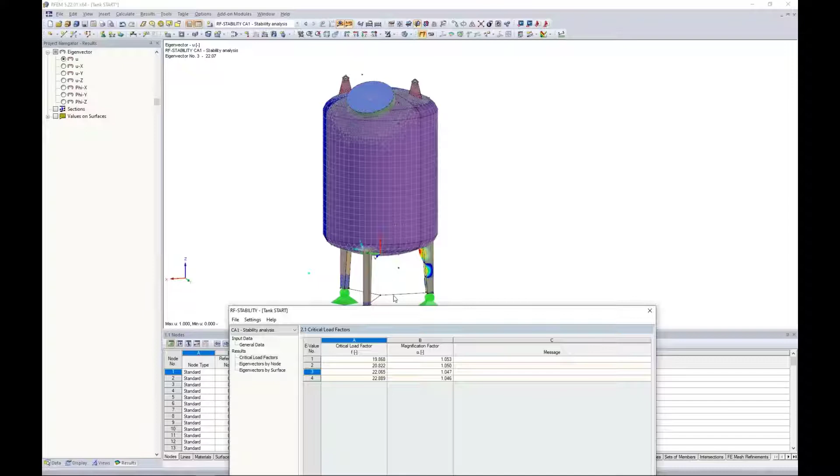Looking at the first eigenmode shape, we can jump to our graphics view. Once again, we are currently in the RF Stability add-on module. I'm just viewing my results graphically here, and under this second option within my panel, we can also drop to the different eigenmode buckling failure modes if we'd like. So everything has to do again with this leg on the right-hand side.

The eigenmode is shown to us here, and I can right-click on the boundary line element of my leg surface. When I right-click on it, I can choose results diagram, which will bring up the buckling mode shape in a results diagram format. Let me turn on the Y direction so we can see the buckling behavior of that leg element along that line.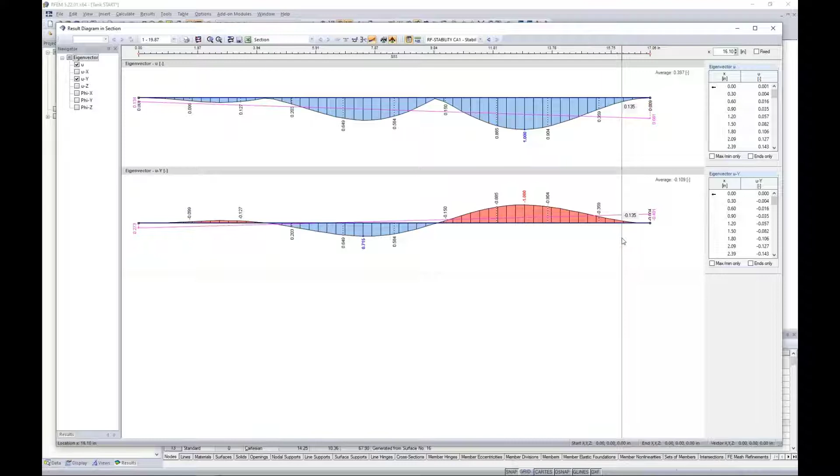Now, the reason I'm doing this whole procedure is because I want to relate this buckling to modeling imperfections. We all know that when constructing a tank or any structure, there are installation errors, maybe incorrect construction methods, or elements that aren't properly manufactured, and inevitably we have imperfections. Everything we're modeling within the RFEM program here is perfect, essentially, and this is true for any general finite element analysis.

All lines are perfectly straight, and all elements join together at every FE mesh point, when in reality lines probably won't be straight, and surfaces aren't all in one plane. Mistakes happen, and there are tolerances given for these mistakes. This comes from the AISC Code of Standard Practice, in particular section 7.13.1, which discusses misalignment of members and surfaces.

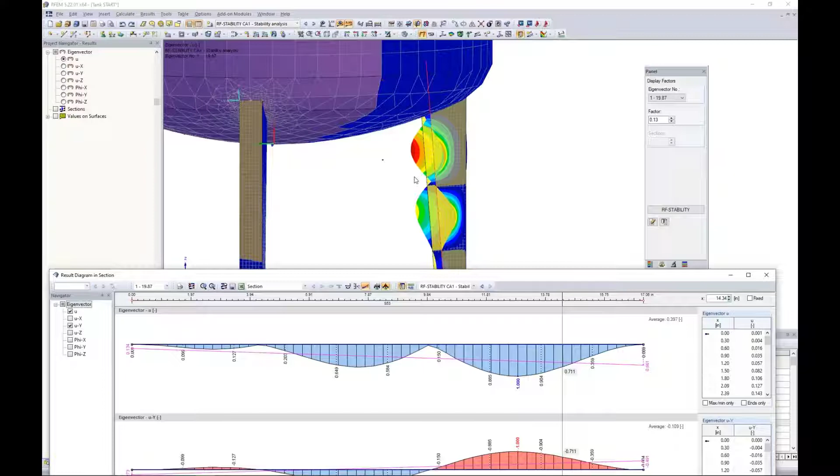These tolerances can be less than L over 500, where L is the distance between working points. Keep in mind that L is not the distance between the start of my surface and the end of my surface, but rather the working points where I see my inflection points. Looking at the general buckling view, I take the first inflection point at about 10 inches, then scroll to the end at 17 inches—this would give me a working point of about 7 inches in total.

So what we want to do here is model the imperfection, keeping these tolerances into consideration. I also want to backtrack and mention that AISC 360 tells us we should really model these imperfections directly. There are alternative methods, such as applying notional loads, but in some way or another they should be accounted for.

We'll refer to the AISC Code of Standard Practice. Now that I have my working distance, notice that RF Stability runs a general eigenvalue analysis, so nothing is given in terms of a length. Everything is unitless, and this buckling mode ranges from 0 to 1.0. So I like to model this imperfection and scale it based on L over 500. With my L being 7 inches divided by 500, we'd want to scale this to 0.014 inches, which is just 7 divided by 500.

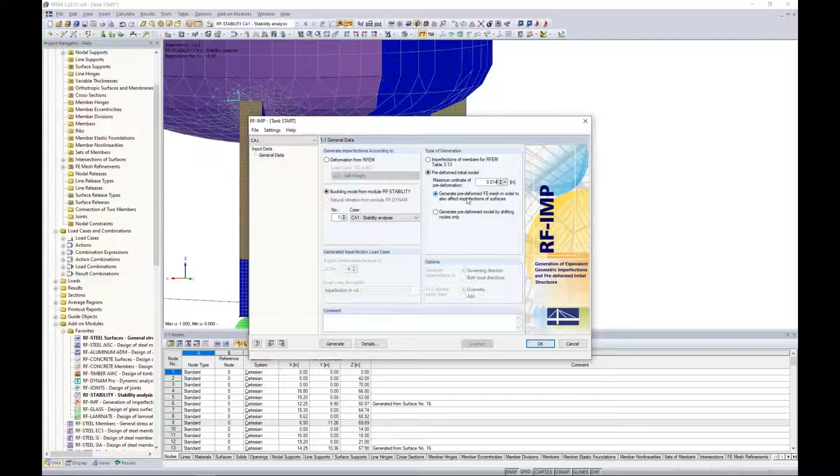This is where I'm going to activate my other add-on module called RF-IMP. RF-IMP is powerful because it allows me to import a buckling mode from RF Stability, so we'll choose our first buckling mode. I'm going to scale this, because remember, RF Stability is unitless, so we're scaling to 0.014 inches as given by the AISC Code of Standard Practice. We can actually generate the pre-deformed FE mesh in order to affect the imperfections of the surfaces. When I click calculate, the program is going to deform the FE mesh based on the scaled buckling mode.

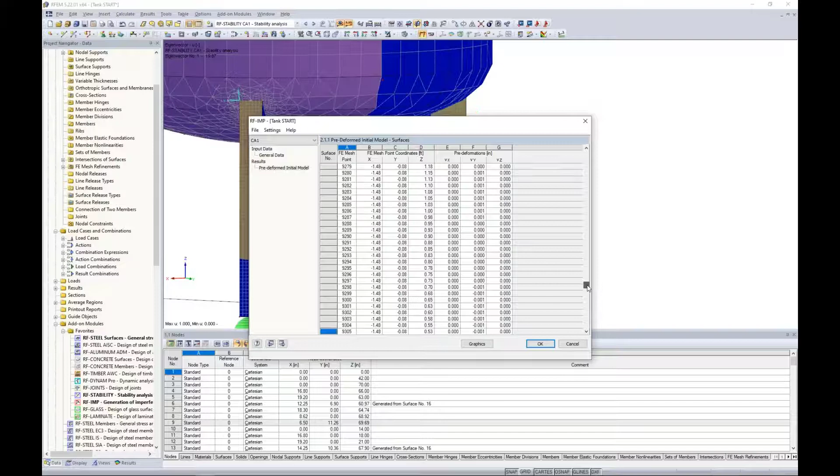Then we'll be able to consider that before we even run the additional load cases, such as dead, live, or wind load. After RF-IMP is done with the calculation, I can see every single FE mesh point listed from my model, and most are set at 0, 0, 0 because nothing's really changed. But we eventually get to a point where some of these values are being modified—you can see the big red arrow. The program is telling me it's going to deform the FE mesh at this location based on the scale of 0.014 inches that I gave it. So now this can be considered as an imperfection and we can directly model it.

Once I'm done with the deformed mesh, I need to go to my load cases and combinations. We visited this dialog box in detail in the first webinar. Under the Load Combinations tab, remember we generated all of our load combinations automatically according to ASCE 7. So I'm going to create my own manual load combination, which I can select from this button in the lower left-hand corner, and I'm going to replicate load combination 3, calling it 1.2 dead plus live plus wind.

So it's identical to load combination 3 we saw up here, but I'm going to take this a step further and apply my imperfection that I just created with that deformed FE mesh. I move all of my load cases to the right-hand side to be considered, and I'll change my load factor for dead load to 1.2. Under the calculation parameters, we have the extra options button, which allows me to activate my deformed mesh from RF-IMP. So that imperfection, the deformed mesh, is now considered with these load cases I've defined. I click OK, and we can run this load combination by starting our results.

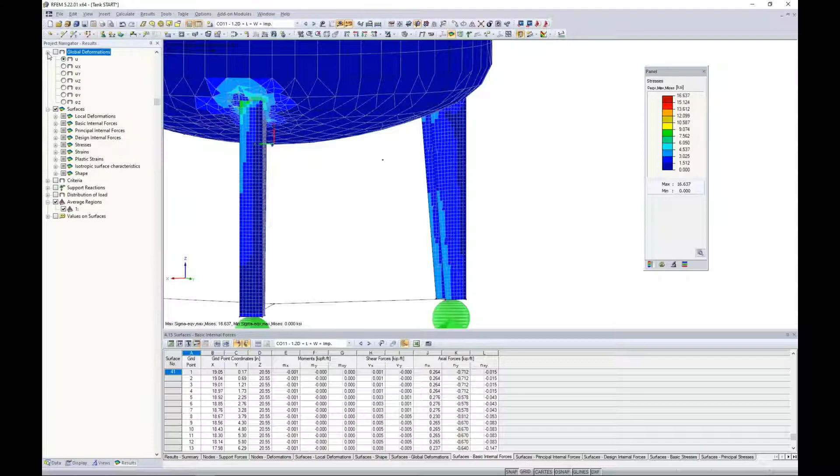But in order to make sure that the deformed mesh was applied, I turned on my global deformations in the Y direction, and we can see that this buckling kind of mode shape with the deformed mesh is considered.

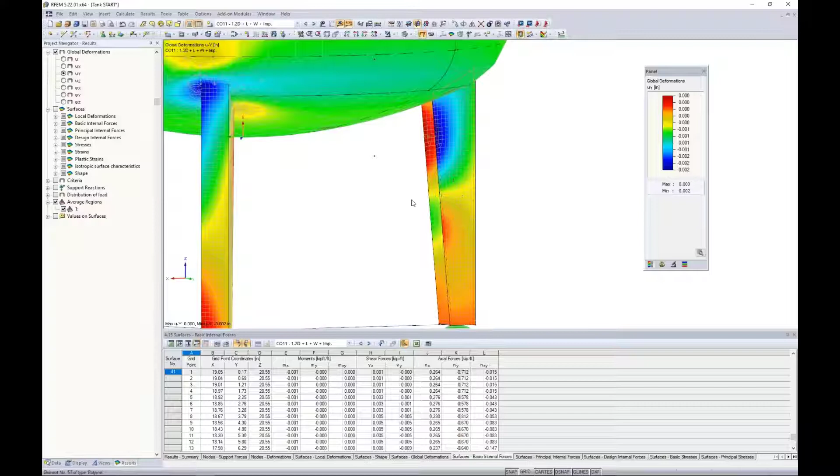We have ever so slightly some deflection here in the Y direction that indicates that mesh was deformed. Possibly with a third order analysis too, we could even see more of those results available to us. But this in general is just one way that we can directly model these imperfections, because not everything is going to be perfect as we're modeling here.

Rather there will be errors with the manufacturing or installation process. So the final thing I'd like to show you today relates back to RF stability. I said that we would touch on a nonlinear analysis for the buckling behavior of the structure. Instead of going back to the add-on module, I'm going to access my load cases and combinations again. Under the calculation parameters, I briefly showed this to you in RF stability for the nonlinear analysis. We actually have all those same options directly within the RFEM program itself under the particular load combination.

So we can incrementally increase a load here until our structure fails. You do need a license of RF stability in order to access this information. The reason why I'm doing it here in the load combination itself is because we have a couple other options that are not available to us within RF stability, so it's slightly more powerful here.

So what I'd like to do is to once again create a new load combination, and we will call this one 1.2 dead plus live plus wind plus our imperfection. Taking it one step further, we will check out this structure until it completely fails with this buckling method. So load combination 12 here is still considering the imperfection, plus we're going to activate the incrementally increased loading.

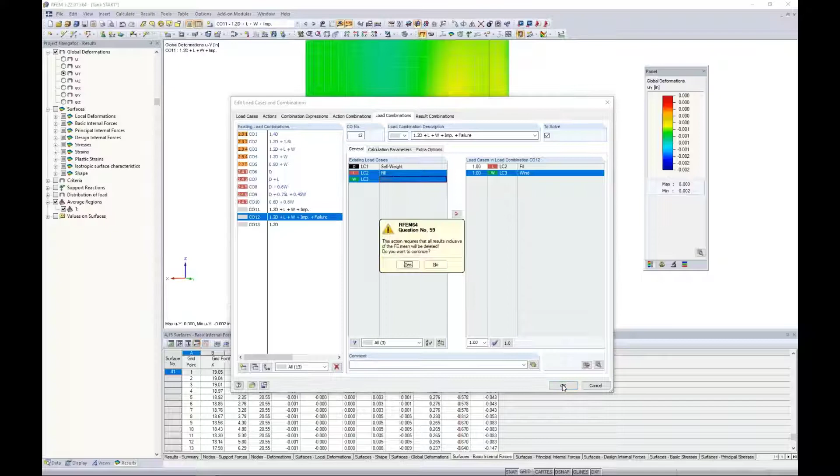So once we have defined this load combination completely, I can click OK. And the program asks me to clear the results. That's fine. And we would want to run the calculation by clicking on show results for this single load combination.

For the sake of time, I went ahead and did this already since it takes a minute to solve. We will be presented here with our deformation results for this particular load combination, and we have the ability to view the different increments.

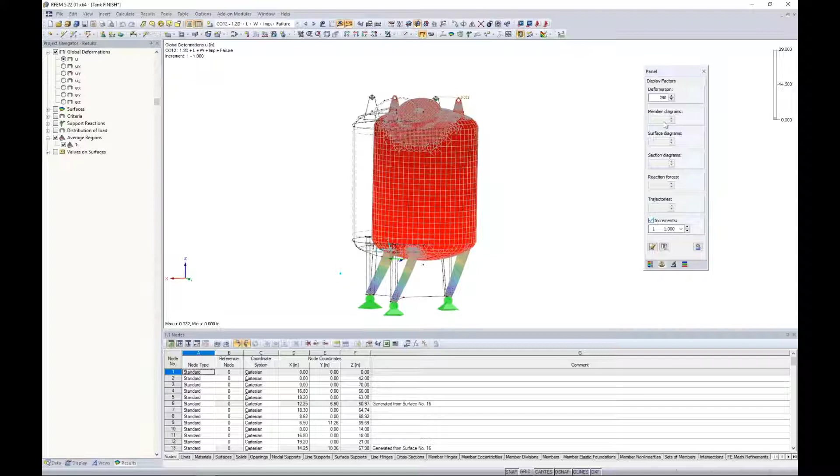Remember, that was one of the checkboxes I selected. Let me change my deformation factor to 30, so it's not quite so big, and lock that down so it doesn't change as I change increments. Under the Display tab, I'm going to hide my results and look at the FE mesh settings. It's default to show the FE mesh on the surfaces, but I'll change that to surface results, so as my structure deflects, the FE mesh will follow. This makes the view easier to see what's going on.

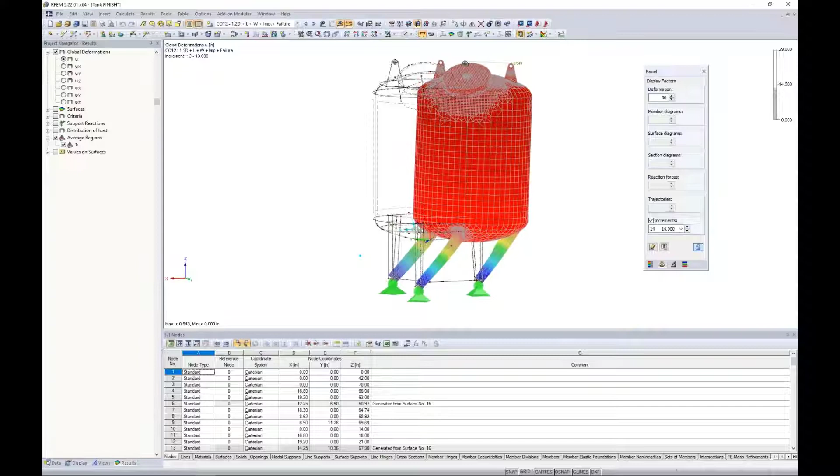So here's my first load increment, with 100% of my loads from load combination 12 applied. Now I can scroll through these different load increments to see the structure deflect under 800%, 900%, 1,000% of the loads. If I zoom in, we can actually see the buckling of that leg element. I can even highlight the leg by choosing visibility by the selected objects, so we can really see the source of failure for this particular leg, and continue on with the additional load increments.

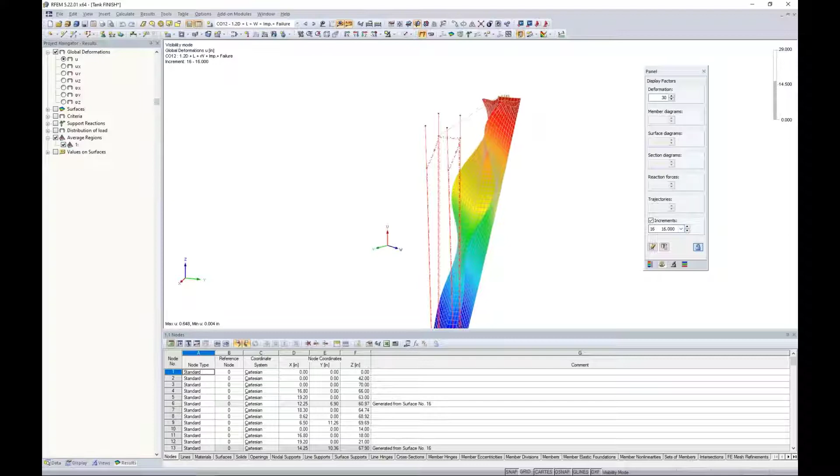Now I can activate the rest of my structure graphically. As we reach these higher load increments, the structure is still holding on, with very large deformations. The deformation factor is set at 30, but the leg is a problem until we get to a point where the program says it can't handle any more. It's reached 29 load increments and the structure has completely failed.

So we might be interested in load increment 28, and we can scale down our factor to 10 just to see the moments right before the structure fails. These load increments are pretty high, but when dealing with a much more sensitive, existing structure, seeing how different applied loads can impact the failure mode can be a very interesting approach within the program. Then we can determine how we'd want to modify the structure.

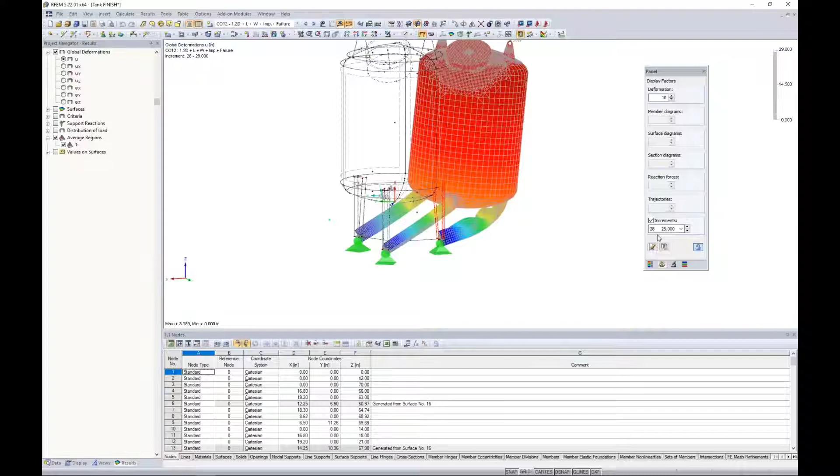Okay, so that essentially concludes our webinar today, and I will jump back to the PowerPoint for just a little bit of closing information.